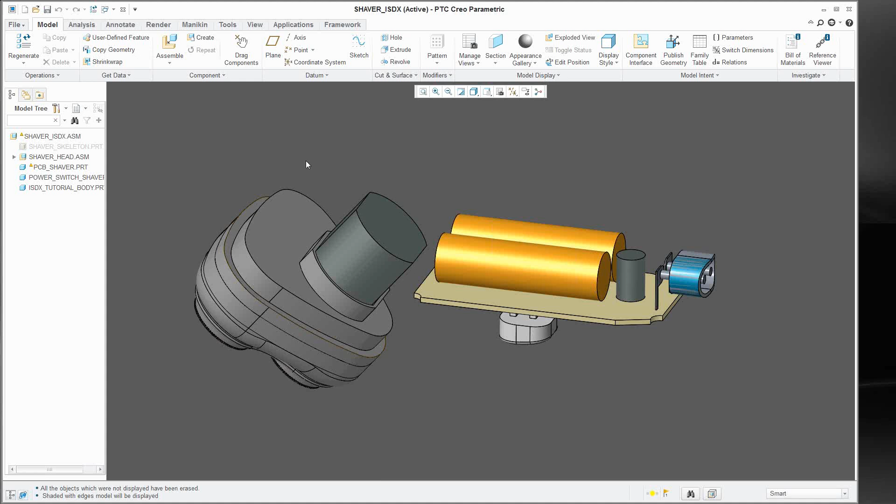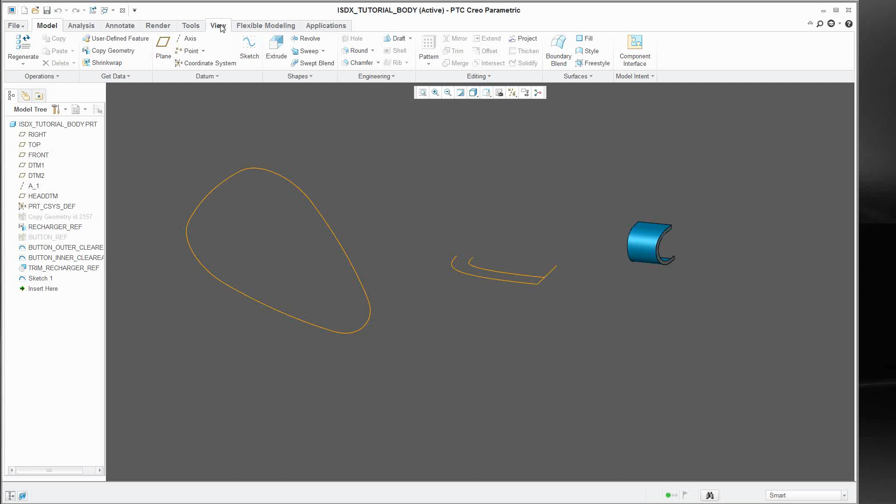Okay, so here is what we're going to start off with. It already has the head and some internal components, and we need to create the freeform body. So we have a part we already created that we have open, with some reference geometry for creating the freeform surfaces. Here we can reference images that some artists sketched up of how they want the shaver to look. We can easily put those inside the Creo Parametric session, so we can use those for reference.

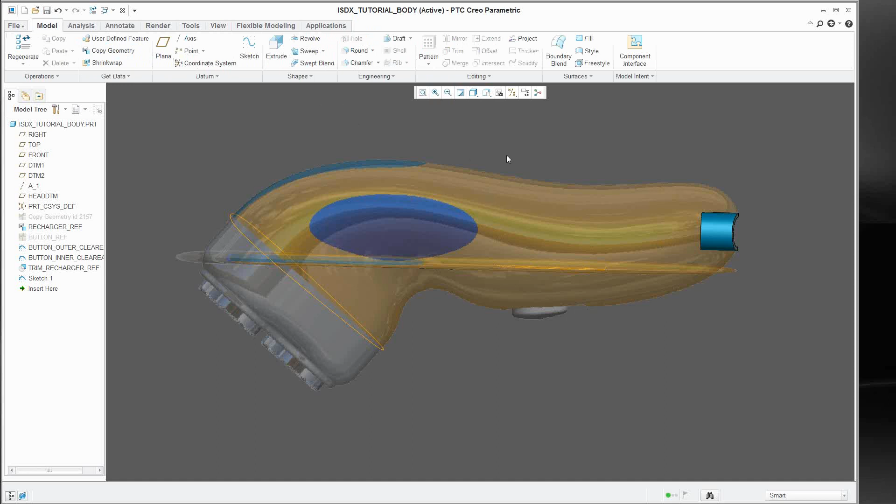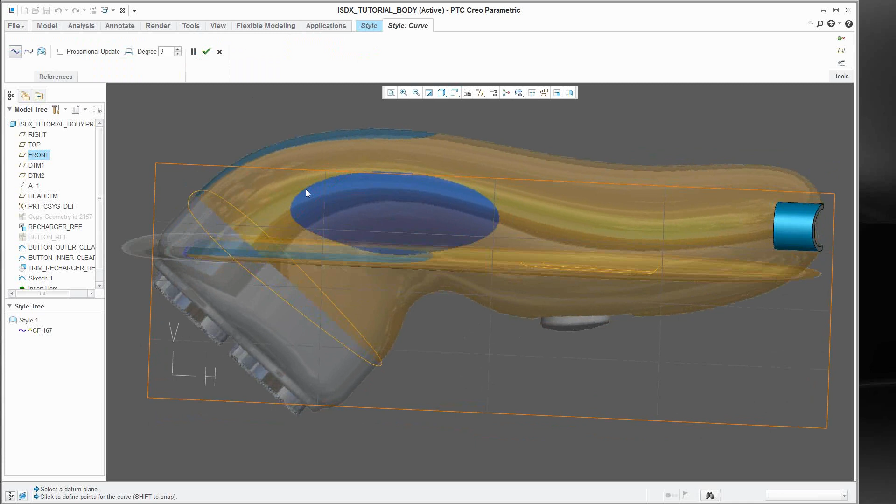So now we can go into ISDX and start creating curves. First I'm going to activate a plane to sketch on, to put my curves onto. Okay, so my first curve here is going to be the upper curve to connect the front and the back. I'm going to place this curve and attach it to the other reference geometry here.

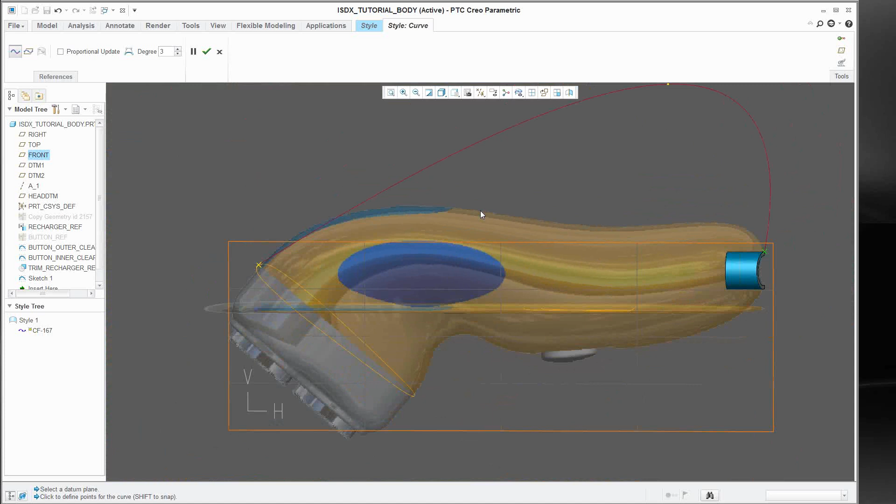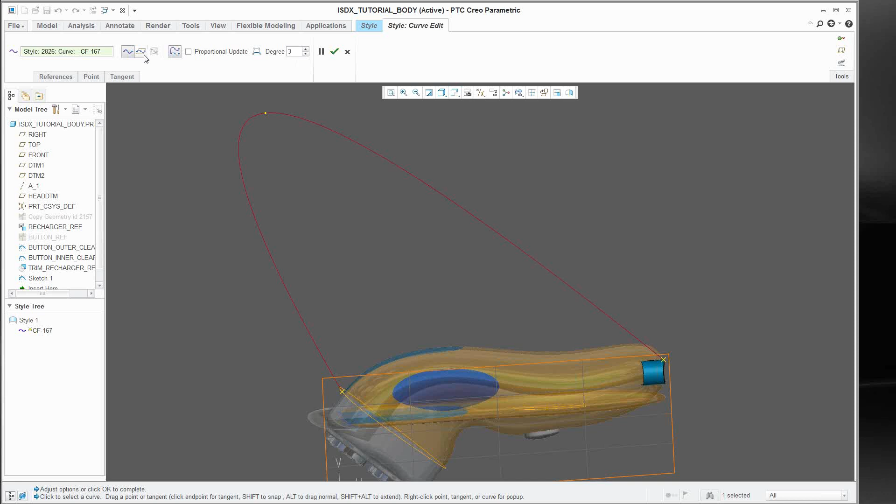And if I take a look over here, I can easily snap the curve to those references that are already there. Right now, this is a free curve, so you'll see that it's going in 3D space in and out of the plane, which is undesirable. So what I'm going to do is designate this to be a planar curve. I can select planar, then let me go in and edit this, say planar and the front plane, and you'll notice that it snaps right to that front active plane. Okay, so that looks good.

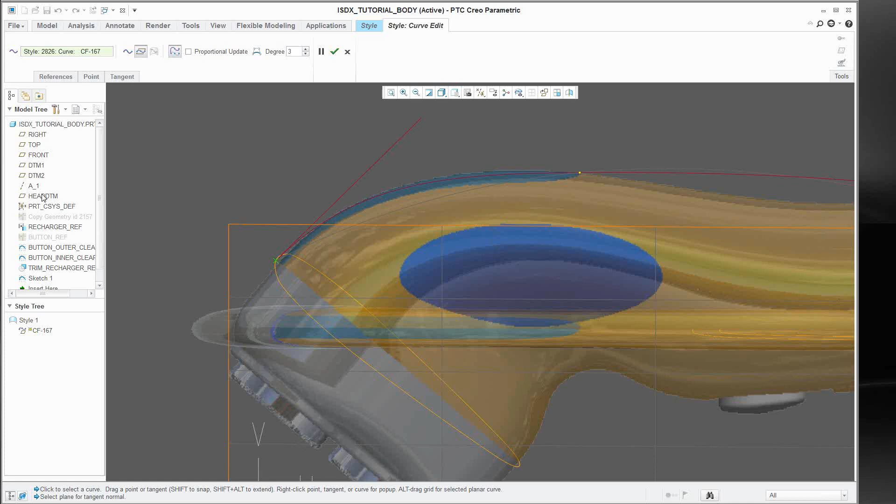We're going to go ahead and manipulate some of this curve so it conforms more to the image. We can take the tangency draggers and manipulate them. This one I'm going to specify to be normal to a specific surface that we already have a datum plane set up for, and it snaps right into place.

Then you can increase or decrease the trajectory tangencies there. And then, up at the top in the dashboard, you can increase the degree of the curve to fine-tune the shape of your curve a bit. So we can manipulate these until we have something closer to the design of the sketch provided by the artist.

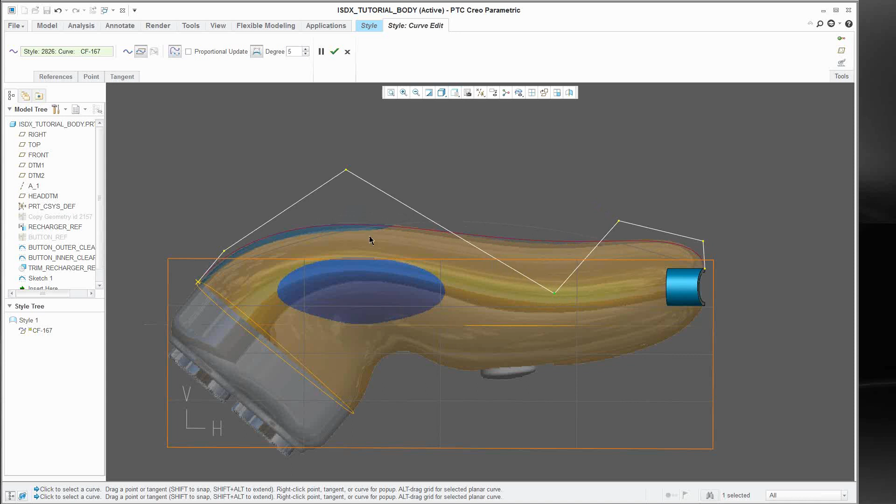So that looks pretty close right there. So we'll say OK and accept that.

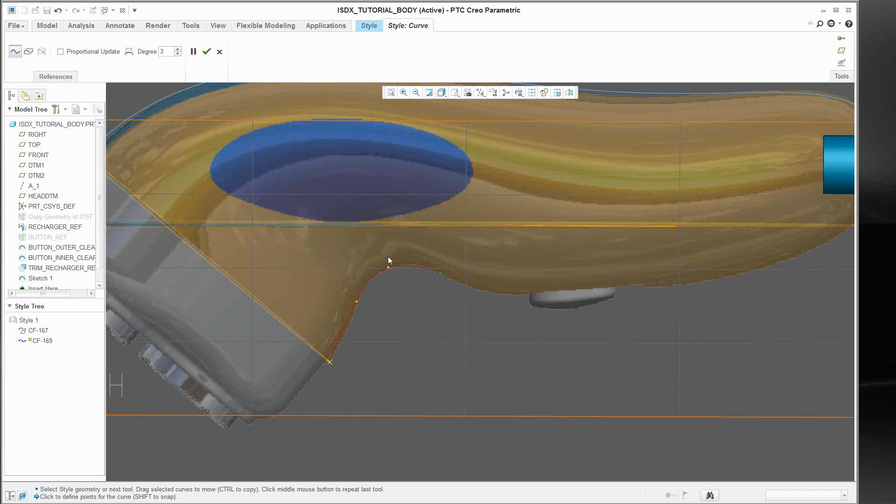So we'll go ahead and place another curve down at the bottom here. We'll snap that again to the references provided, and a couple locations here to accommodate for this curvature in the handle. And again, we'll come over here and snap that right to the reference.

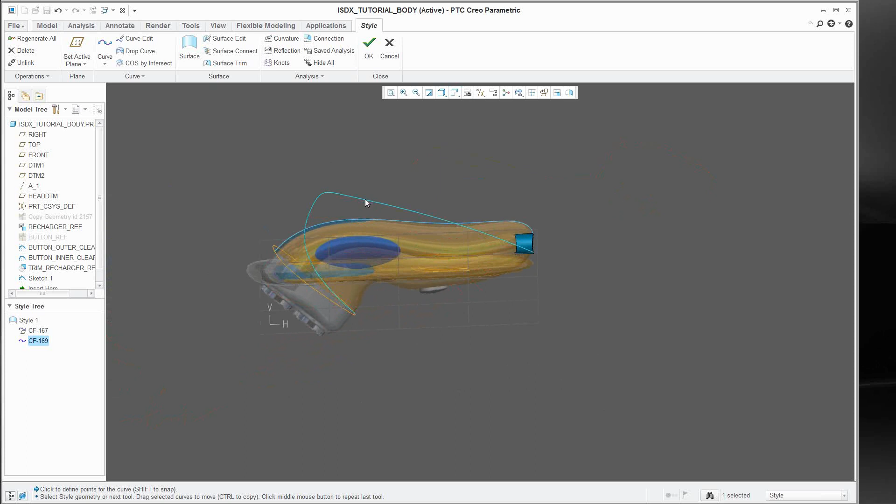So that looks pretty good. And again, I forgot to change it to a planar curve, which is okay. We can always manipulate that and say planar, and then where you want to snap it to, and that will go right to the location.

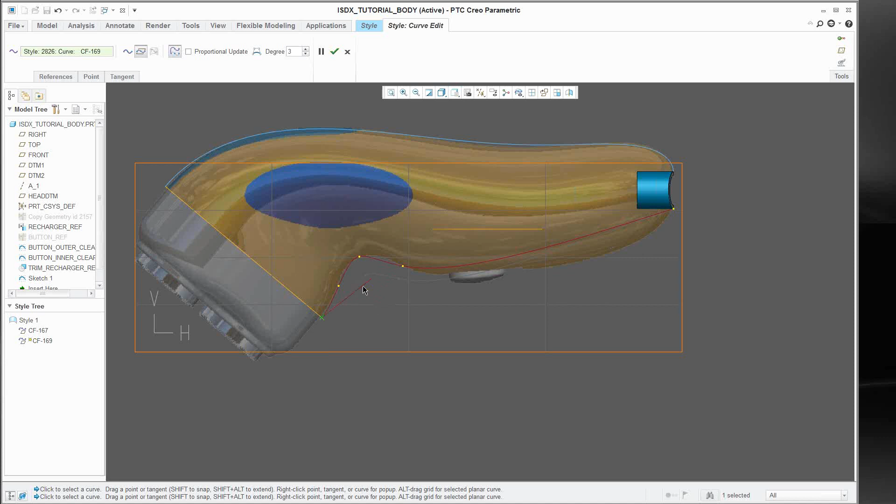We're going to have to manipulate some of these points that we put in though, which is okay. You can easily select them and drag them about. And again, this first point here, we need to make sure its tangency is normal to the surface here. So we'll select that to be normal.

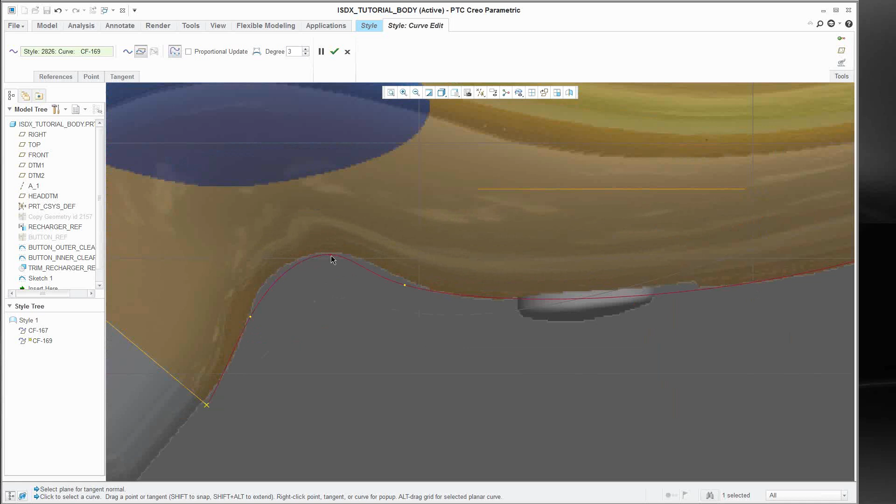And again, we're going to move these a little bit so the curve matches the shape a little better. And then come back over here and change the tangency of that curve. Okay, so that's looking pretty good. Zoom this in a little bit.

So you can play with these curves to get the right shape that you want to, and it's really easy to do. Okay, so that's two of the curves for our shaver handle.

So next we need some more curves to be able to generate the surfaces. So first we're going to create another curve that goes along the edge here.

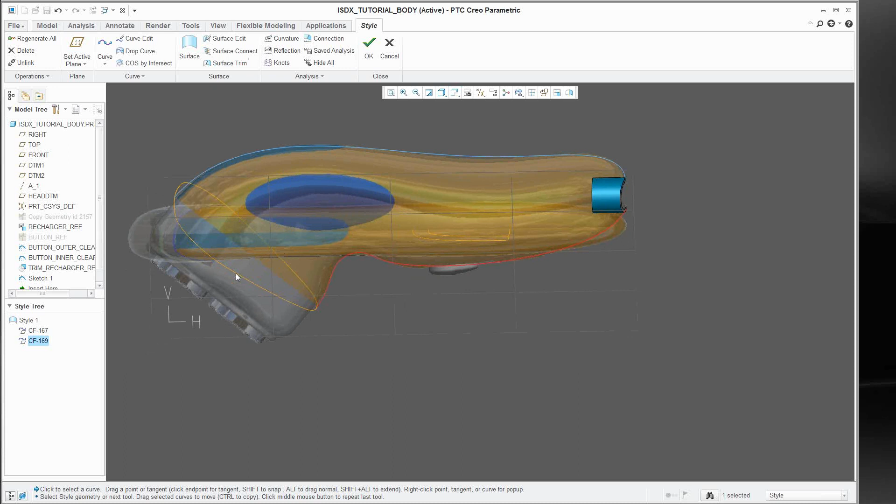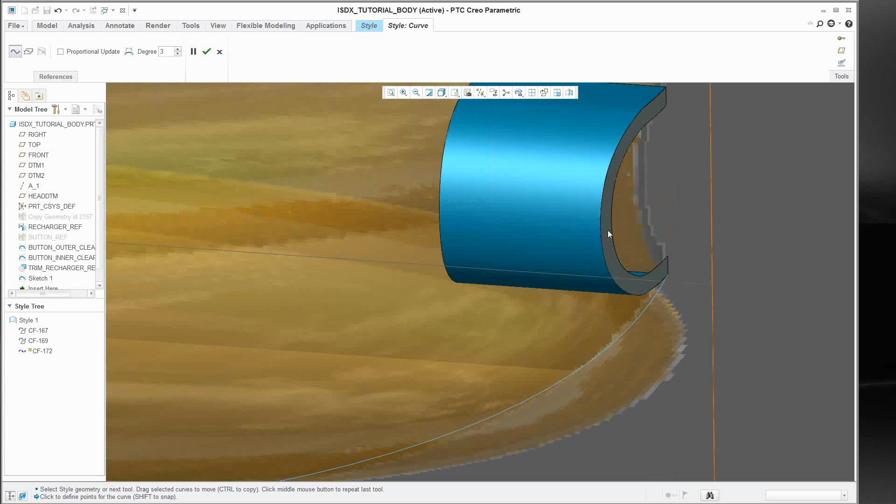So again, we'll create a curve and snap that right to this line, and this one's going to be a free curve because it's going to be at the center, so we want it to go out of plane. And here we're going to snap that also to the existing reference.

So what's nice about this is that you can utilize 4 views to generate your curves, and you can work in all of them. Oop, let's undo that. Okay, so here our curve is just going from A to B.

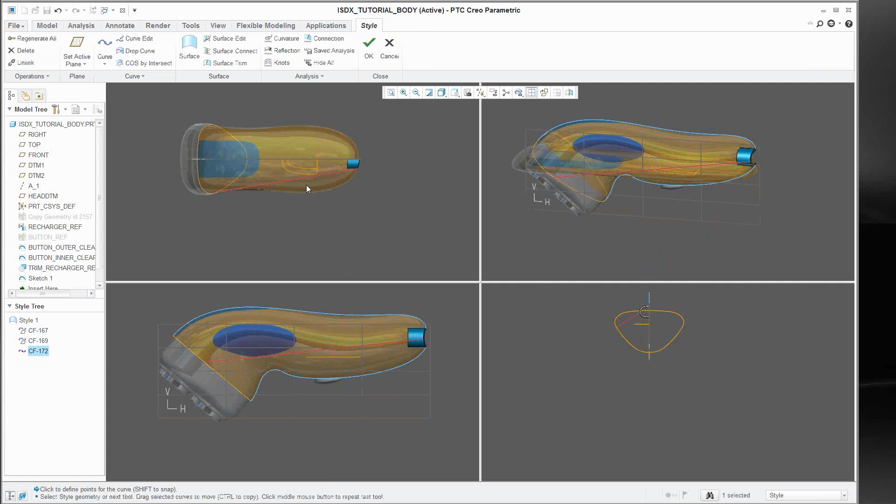So here, in this view, I'm going to specify this point to again be normal to the reference datum. Okay.

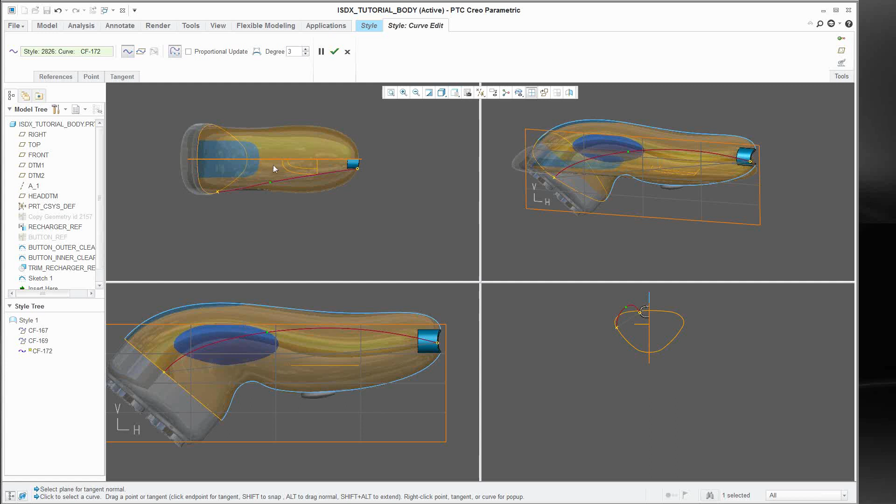And I also want to put another point in here that I can control. So I can easily do that and then move that point. And you'll see up here in the other view that the point happens to be within the body, so we're going to pull that out.

Since it's a free curve, you can easily manipulate that in all these views. So the point down here needs some more curvature, so we can easily change that by dragging the handle out in this top view. And also you notice that it's not following the image in the other view, so we can drag it in that view also.

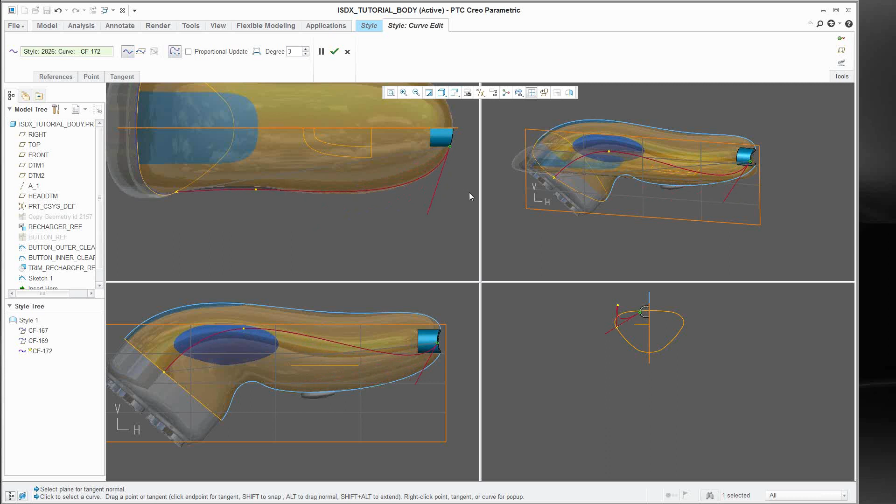Okay, so that's starting to look like the way we want it to. If we need more control points, we can always increase the degree here to refine that a little better.

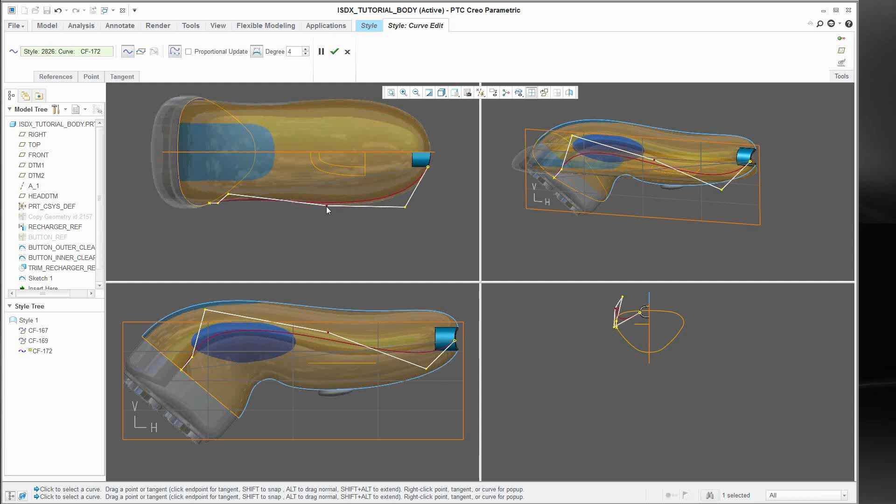Okay, so that looks pretty good. Again, we can go and manipulate this in all views here to refine that. So that looks pretty good there.

I could take a look in my ISO view and see that those 3 curves are starting to form what I need to make the surfaces. So down here at the end, I need another curve to connect these 3 curves together, so I have an end to my surface feature.

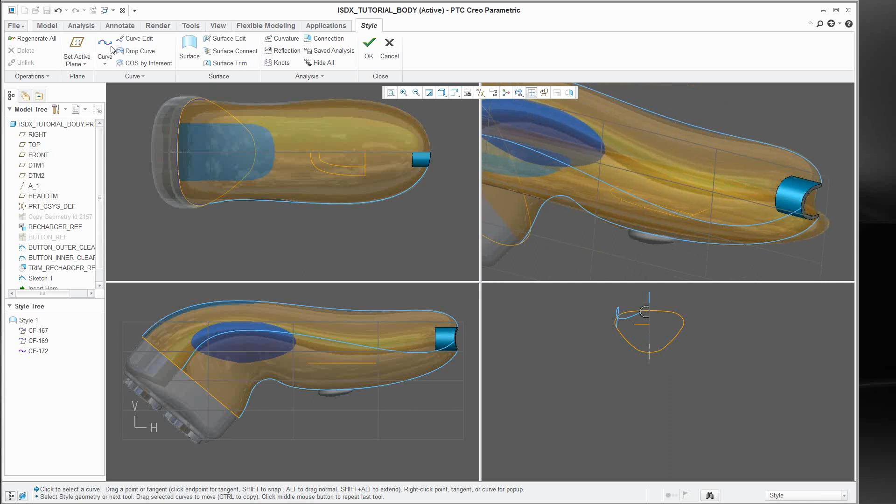So I'll go over here and create another curve, and I'll just snap it right to these existing curves. Okay, but we see it doesn't really match up with the existing geometry we have here.

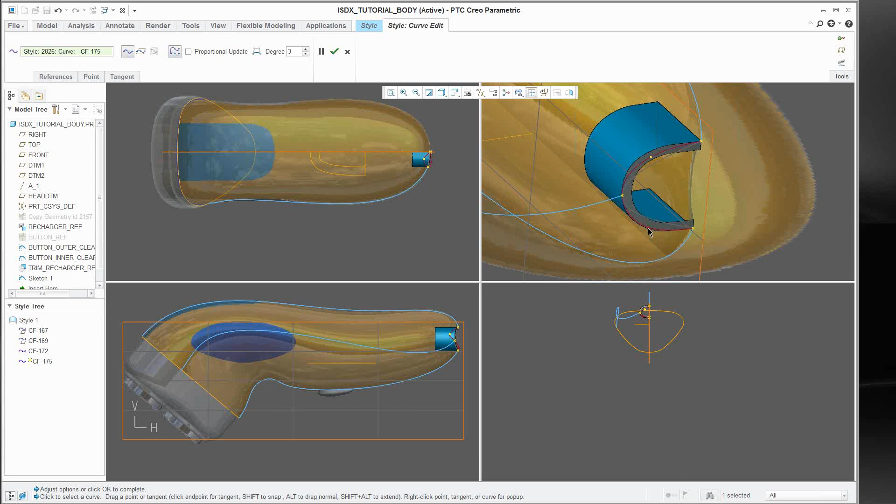So we're going to go ahead and add some other points in here that we can manipulate so it lines up with the existing geometry.

So what's nice is that we can see how this is out of plane. We can just take this one point and snap it right to that reference, so even if it's a curve and it's out of plane, you can snap it right there so the geometry is accurate. I'll do the same with this other point. So that looks pretty good.

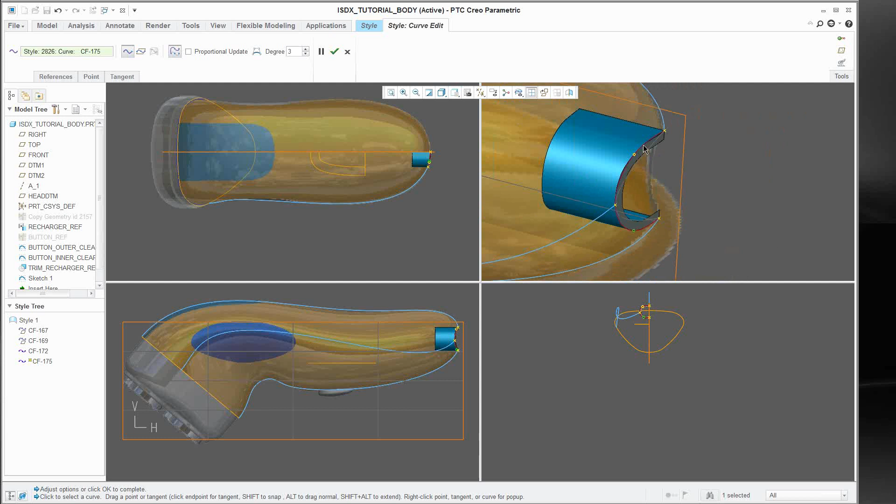So now we're done with this feature here. We can exit the 4 views and wait for it to process.

So we're pretty close there. I had a technical difficulty, so I'll have to reopen up Creo Parametric real quick here.

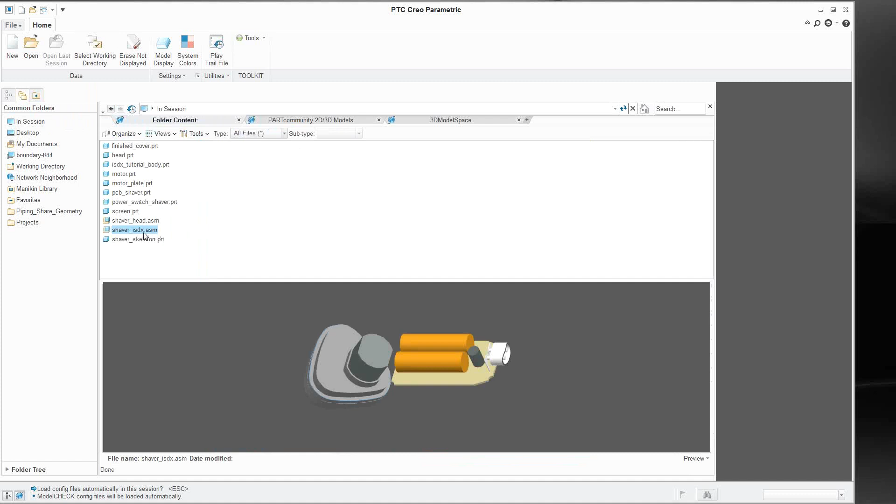Okay, so we're back up and running. Let me get those files up and running again. So if I see what we have here, here's the shaver body. Let's see if I can put this back together real quick and create some curves.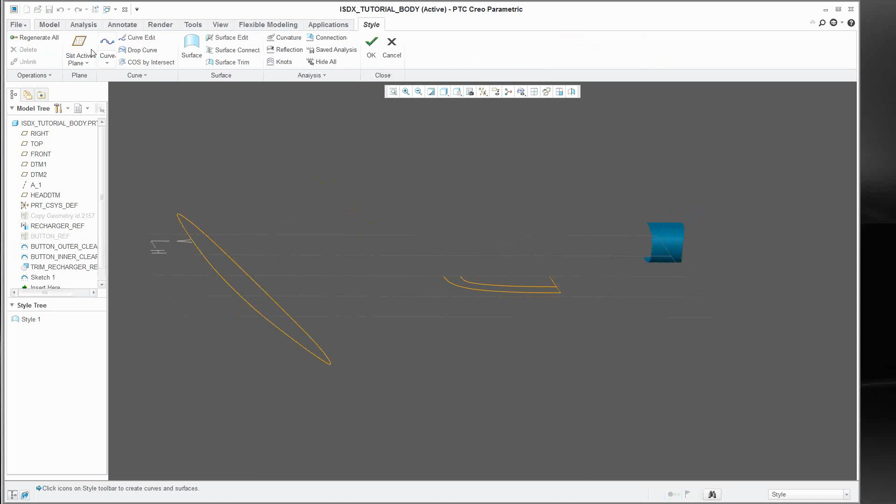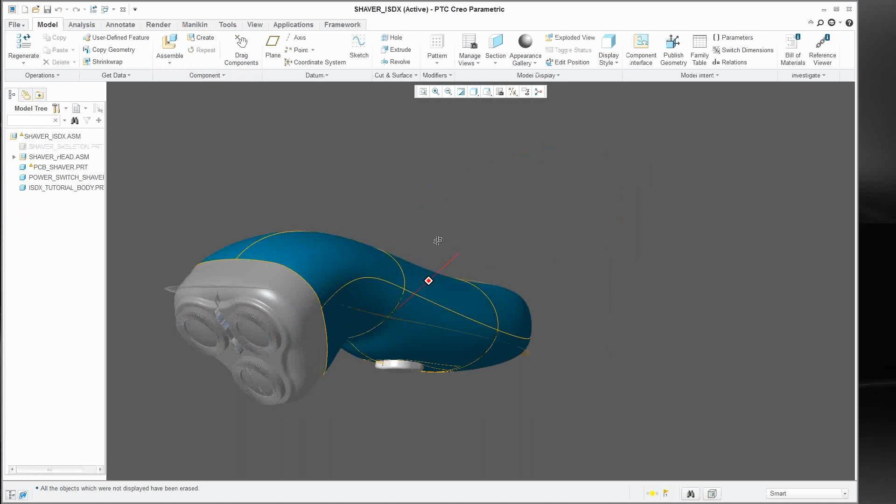Oh, better yet, let me go back and see if I have... okay, so I'll go in here and show you the end result and then work it backwards. I can do that fairly easy. Let me turn off these images.

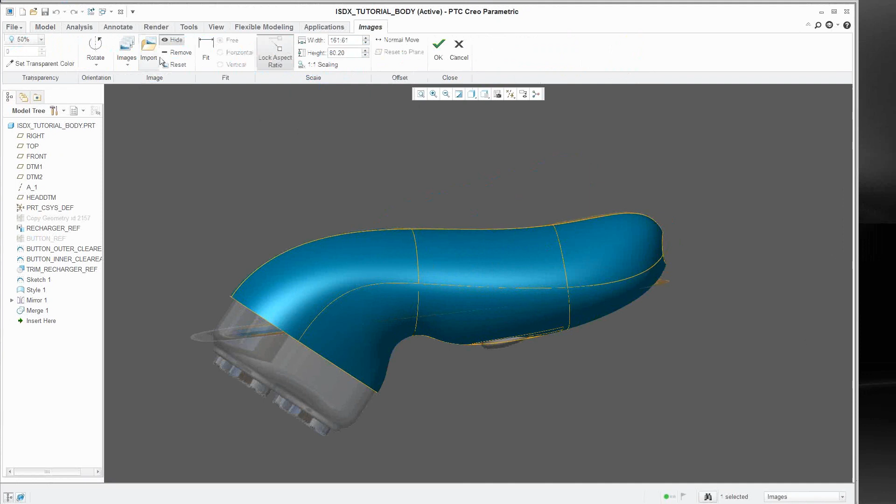Open this here. Okay, sorry about that. So let me turn off these images. Okay, that one. This one I would like to hide. Hide all of these. So let me get rid of some of these features.

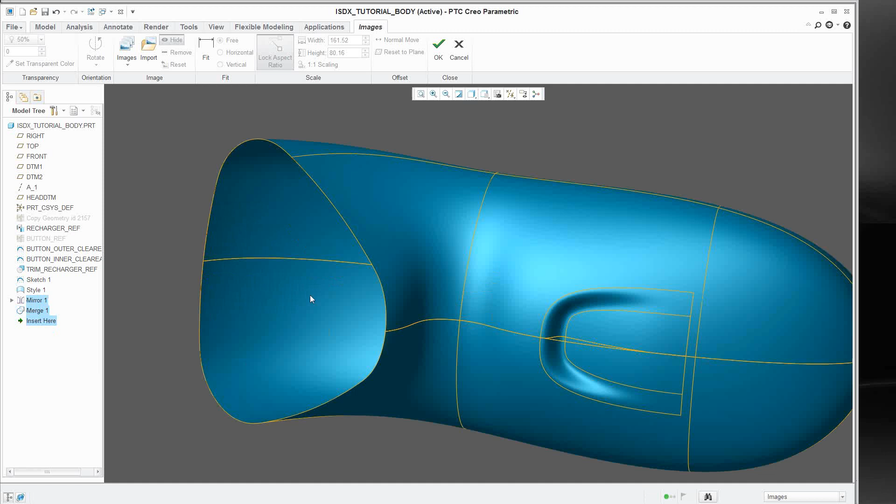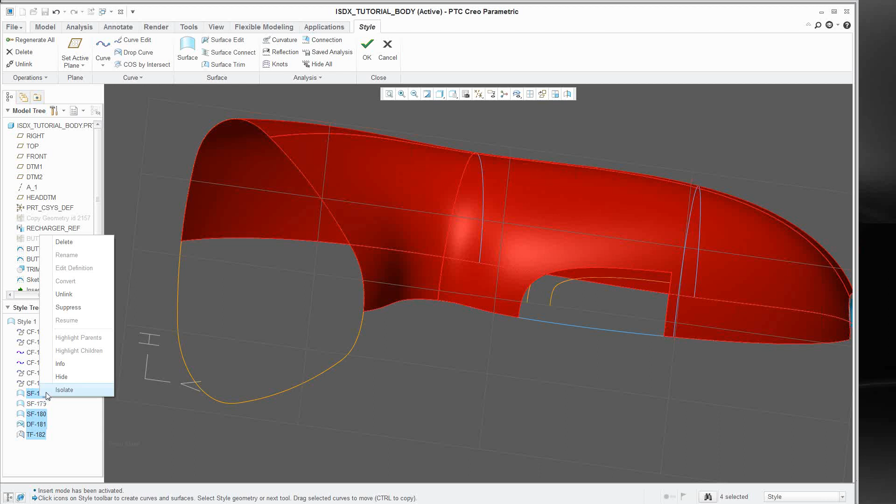And go into the style feature, and just delete some of these. There, now we're back to where we were pretty much. Okay, let me get rid of these curves. Okay, great, so now we're back to where we were. Sorry about that. So we have our 4 curves here.

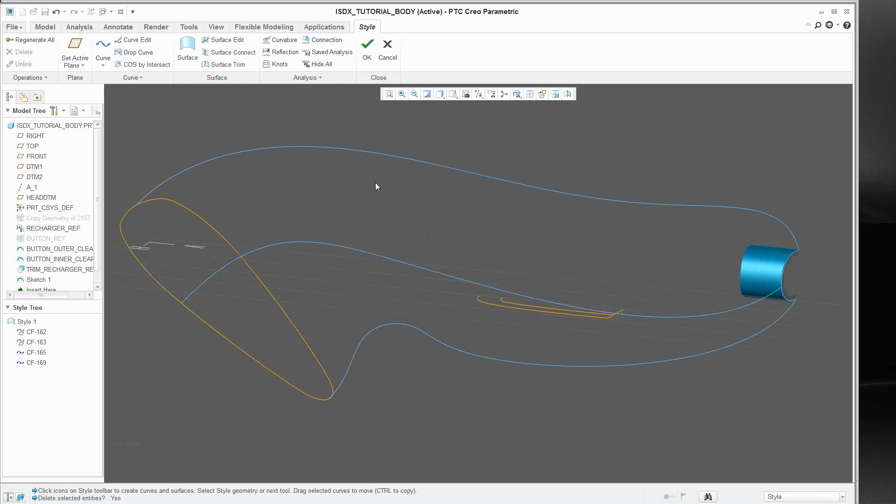We need to create some other curves in between here to reference so we can manipulate the shape a little better. So here we're going to create another curve, and we're going to set the plane to reference. It has to be a planar curve to be able to reference it.

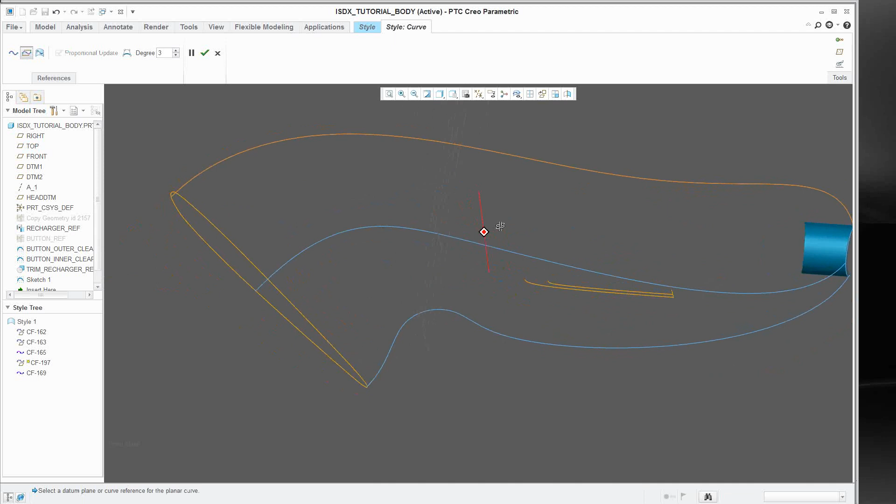So we'll go to the reference collector and set the plane right there. And that's a little bit far away, so we'll move it a little bit further. You'll notice that this plane is normal to the reference curve. There we go. So that looks pretty good.

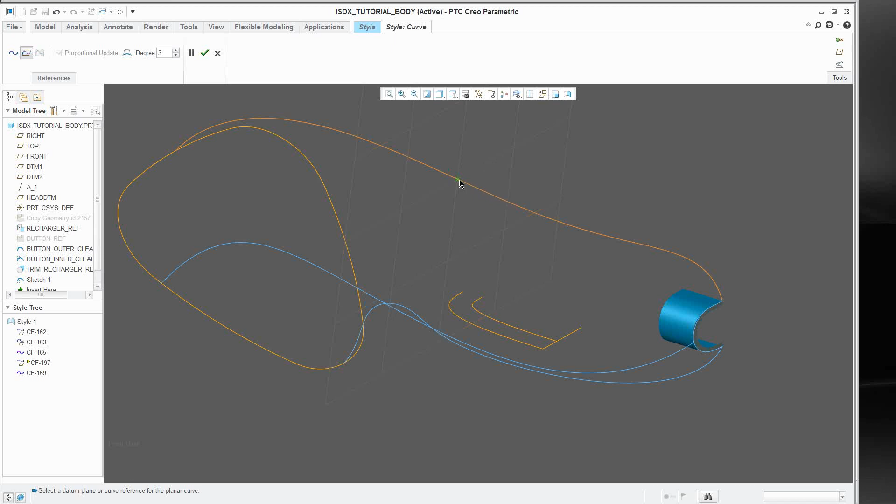So now what we can do is easily create a curve that connects these 3 curves together. I'll go ahead—notice that it automatically snaps to this point here because this curve intersects the active plane. So that makes for easy curve creation, as you can see there. That looks pretty good, and I can come back and edit the tangencies of these points.

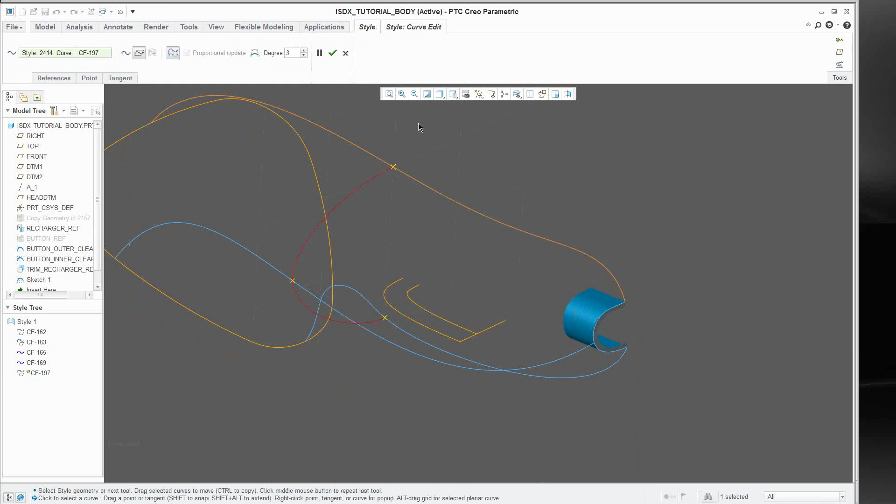I want this one to be normal to the front. Same with this guy here, I'm going to change that to be normal to the front. Okay, so now that I have that, I can easily copy this curve and then drag it downward. You'll notice that all these points stay connected to the curve as it gets dragged down.

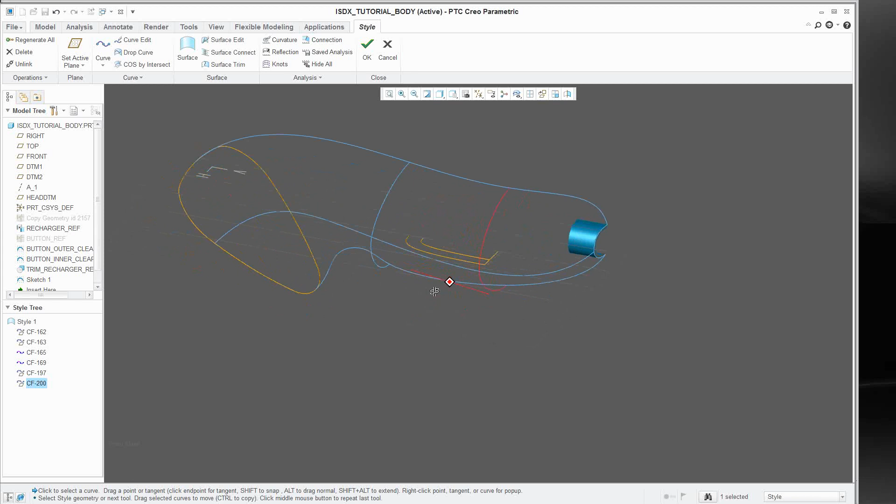Okay, so I have this maybe a little bit further, so I'm going to utilize some of these existing sketches for references. Okay, so now I'm going to go ahead and create a surface feature. With this, you can select the surfaces in pretty much any order and create those high curvature surfaces that you can see here. So it's very easy to utilize.

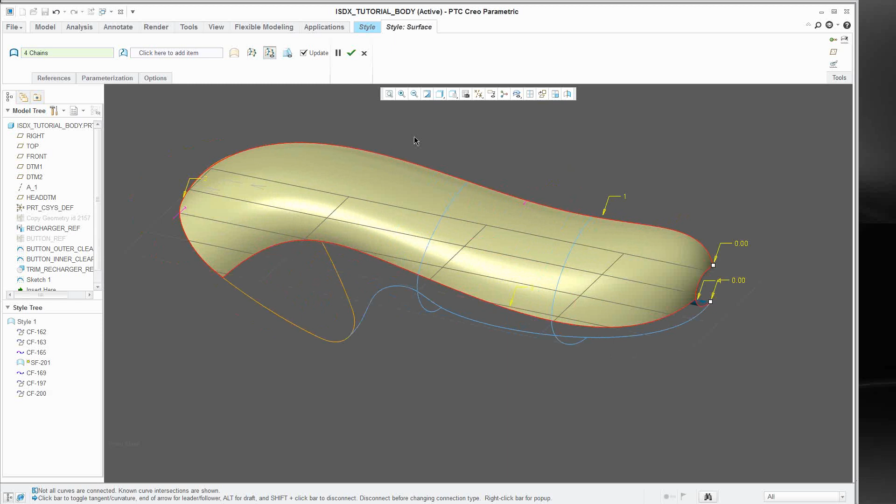So we see that these curves here aren't really being utilized right now. The curvature goes outside of the bounds of these curves that we would like the surface to lie on, so that would really be an internal curve. So we'll go ahead and select those so they lie down on top of those curves. That looks pretty good.

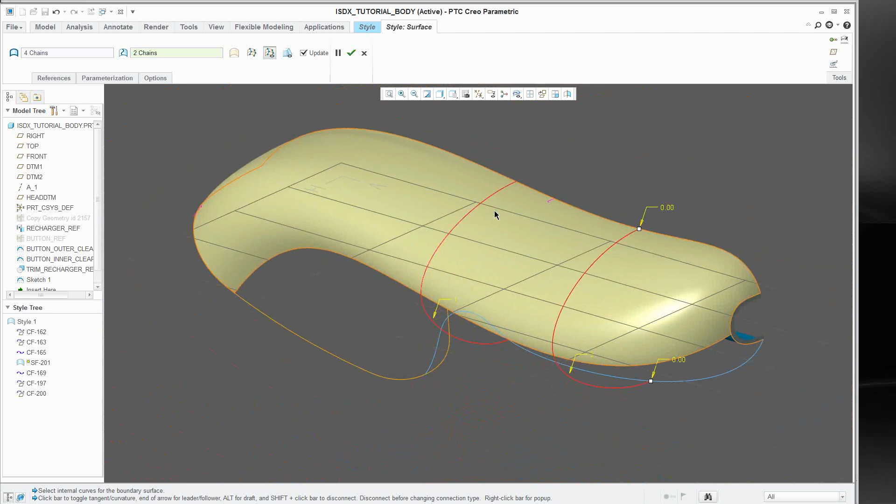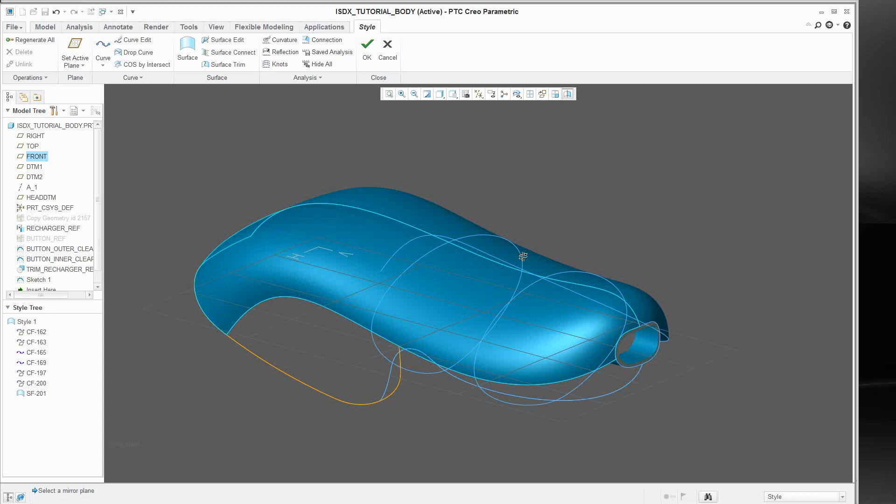Okay, so we're also going to check the curvature here just to see what it looks like whenever it's all done. So you can visually mirror the surfaces, and I can do that here and just select the reference for mirroring, and you'll see that it's starting to look pretty good. So the curvature looks nice here within this mirror.

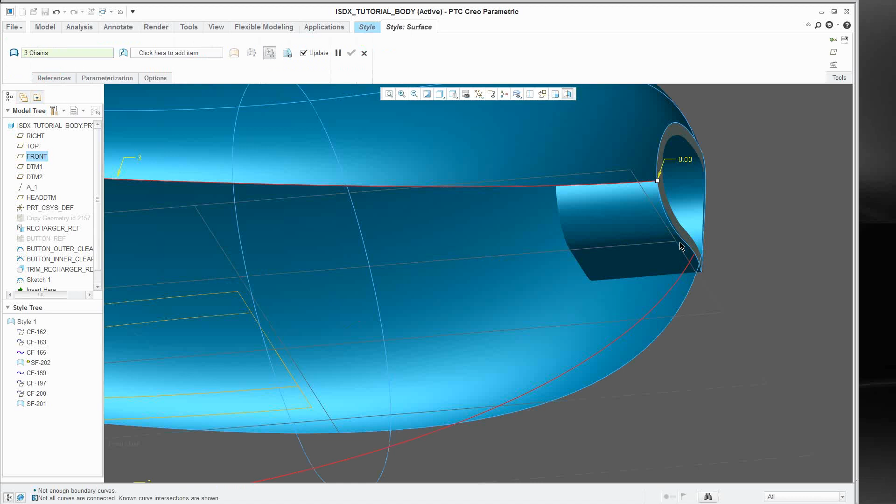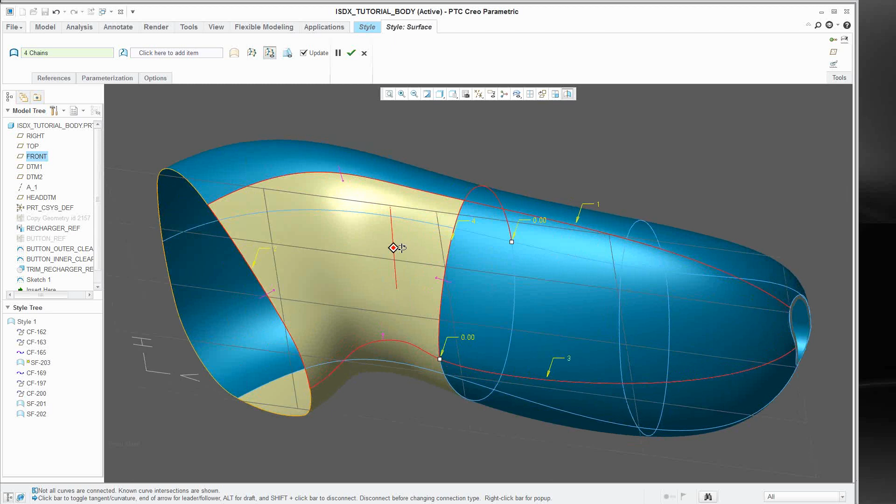And then again over here, we can fill this gap in with the surface by selecting those reference curves. Now you see those little arrows by all the tangencies of the surfaces, is where you can manipulate whether it's a position, tangent, curvature, or a draft tangency. So you can increase or decrease the amount of curvature there. Okay, so that looks pretty good.

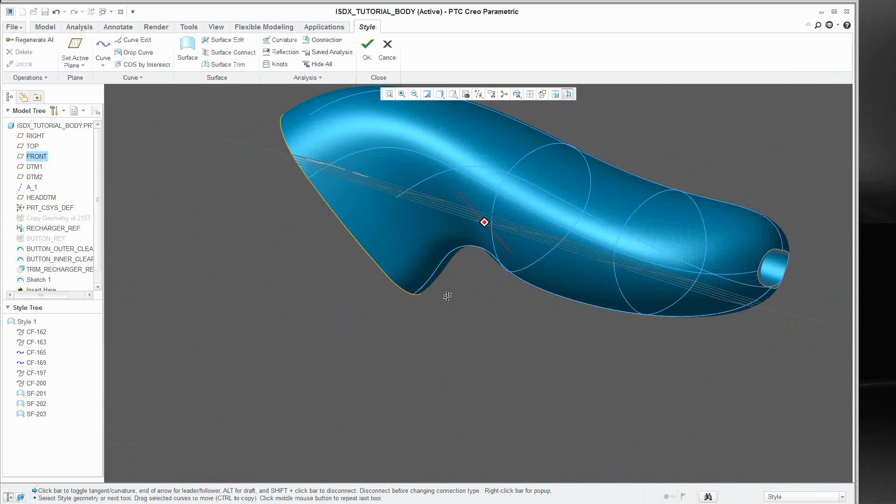So this is really starting to come together. But we do realize there is another feature here.

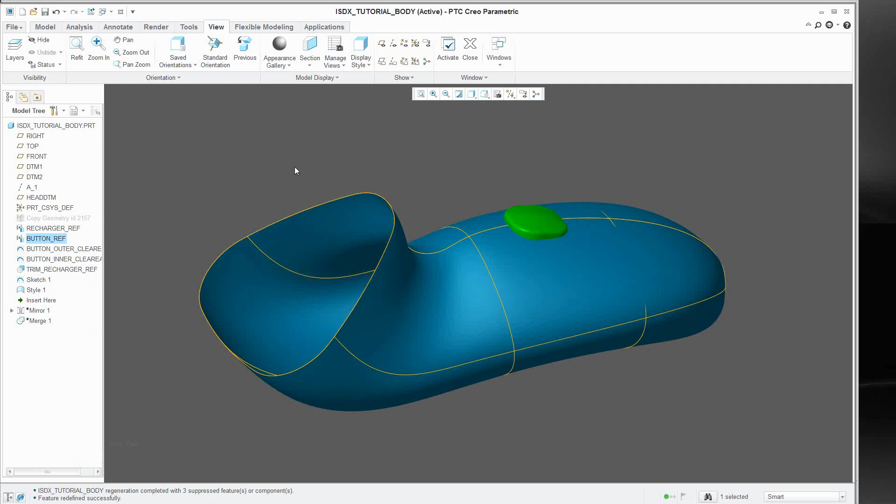Okay, so we'll go ahead and unhide this. We need to be able to have a little scoop in here for this button, so we need a little relief in this section for that. So we can go in and

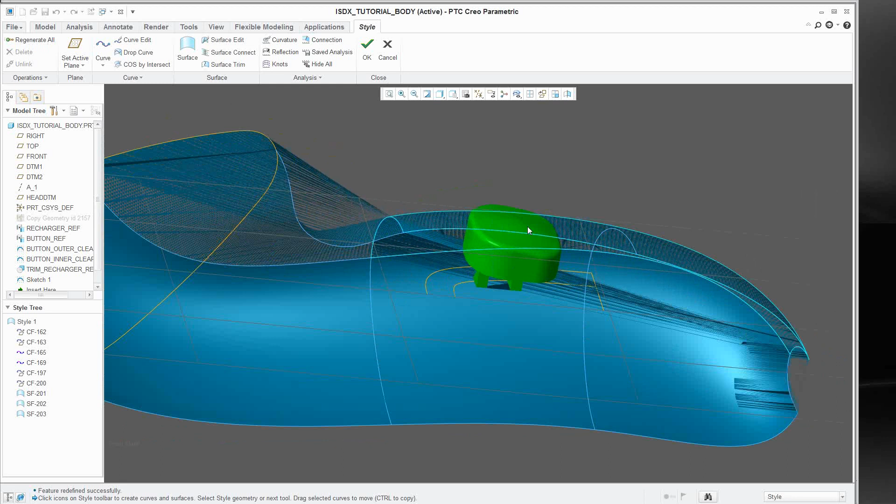utilize ISDX for that. We're going to get rid of the visual mirror here, and then make another surface that comes down and scoops out this portion.

So we notice we have some curves, parametric curves down here that we can utilize to trim some of these surfaces. So what we're going to do is

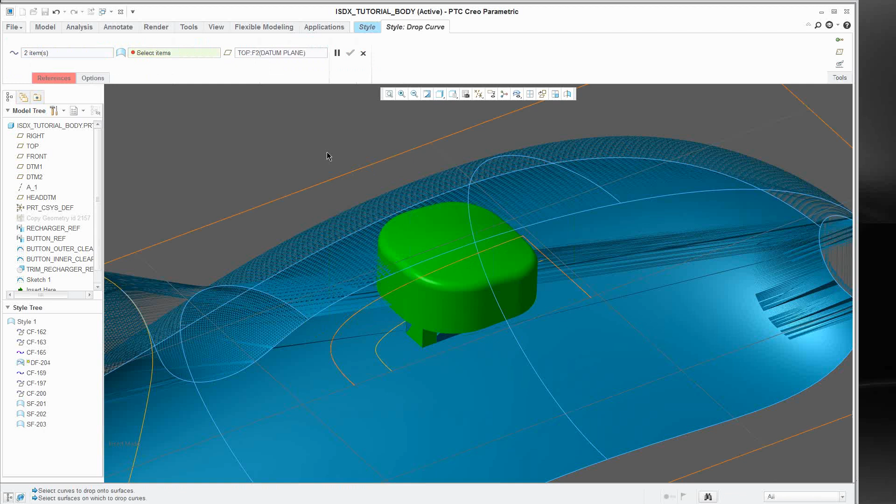drop these curves on the existing surfaces. We see those get dropped onto this surface, and then we can utilize those curves to trim them.

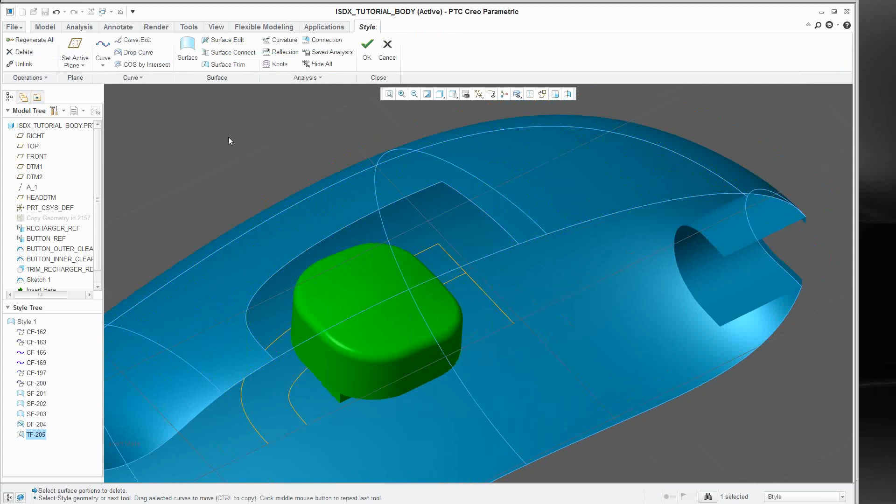So we can easily trim away the surface within that region. Okay, so that looks pretty good.

So now we need to create some geometry, some surfaces to represent that scoop. Okay, so here we're going to place a curve, the free curve,

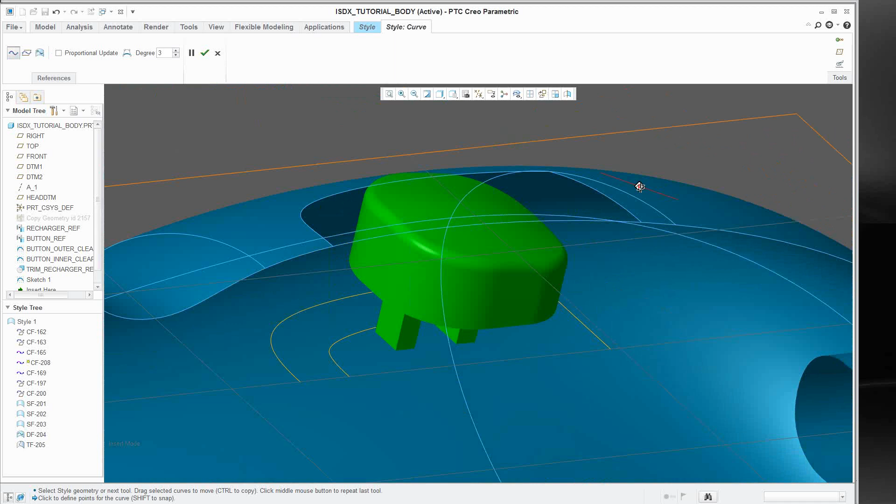and we would like to go from here to a little beyond where we want to utilize the surface, because we're going to end up trimming some of that away, and that's called the overbuild method.

You can build some of your surfaces and curves a little bit bigger than what you need to, and then trim them away.

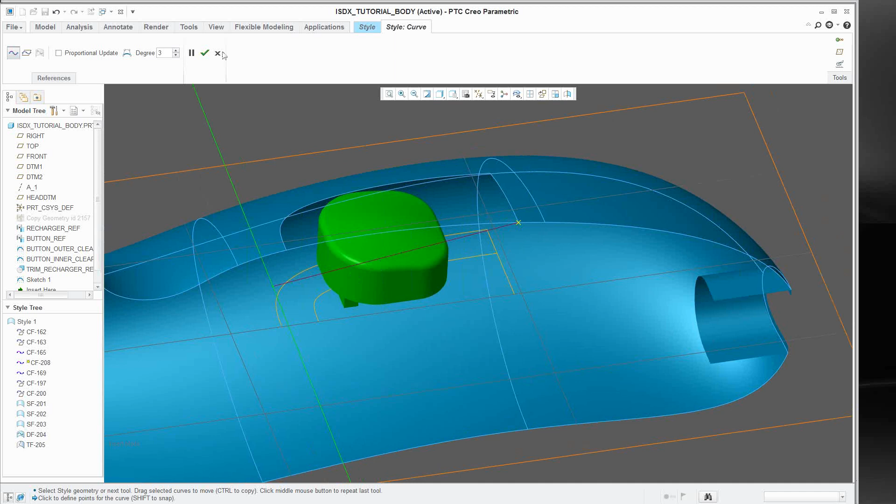So that looks good right there, except we would like to change the tangency here a little bit, so it is tangent to the existing curve there. So that looks good.

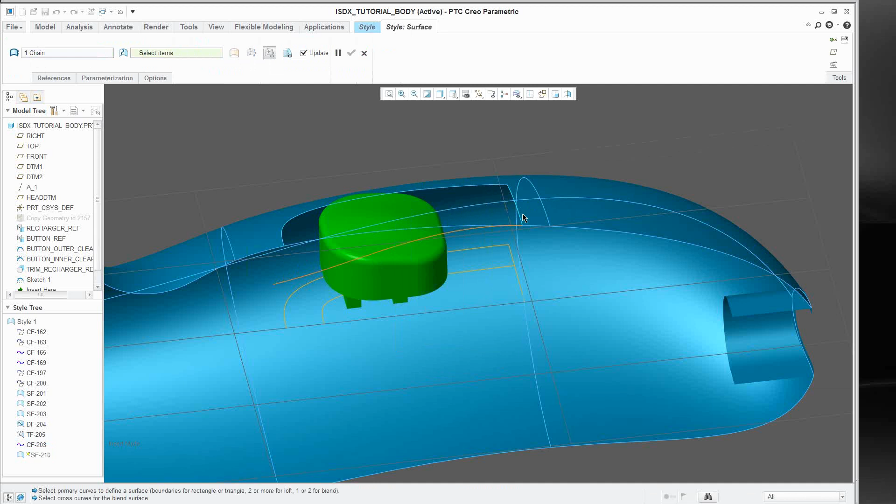And then we can make a surface out of that existing curve and then utilize the existing edge here for a cross curve. That creates our downward swooping curve or surface.

And we have some other geometry down here that we could easily drop onto the surface that we just created, and then do the same trimming process as before.

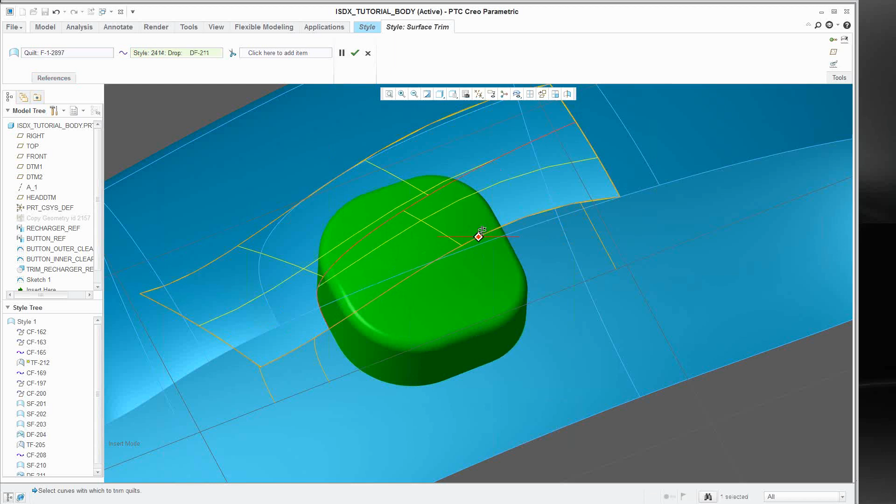Except this time we're going to delete this outside portion, so we can put another curve and surface in there to connect them together.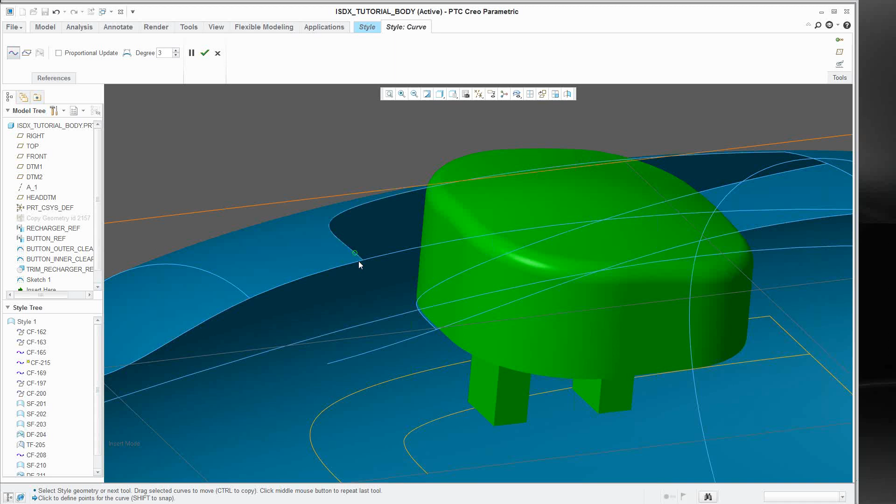Okay, so that's starting to look pretty good. So let's go ahead and put another curve in there. And again, we can snap that right to this existing geometry.

And then afterwards, manipulate the tangencies of that curve. So that looks good.

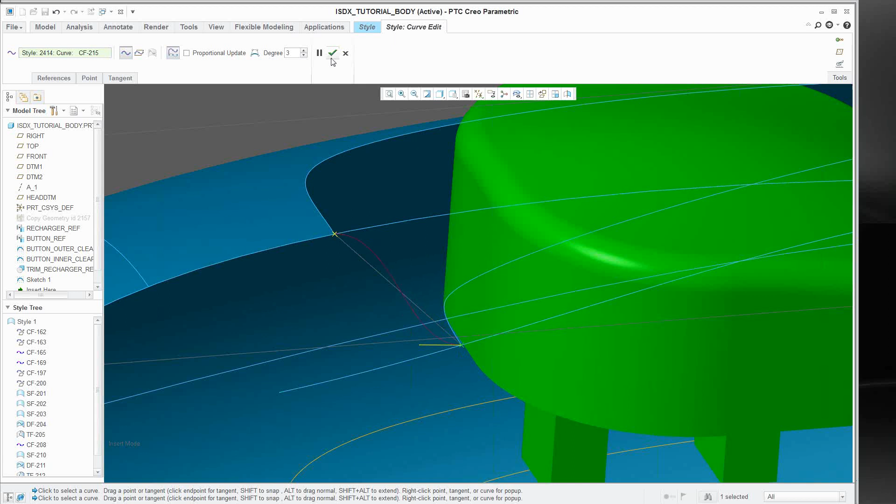We'll accept that, and then all we have to do is generate that surface. So we go up here at ISDX and select the boundaries of that surface, and we'll see it generates that nice swooping surface for us.

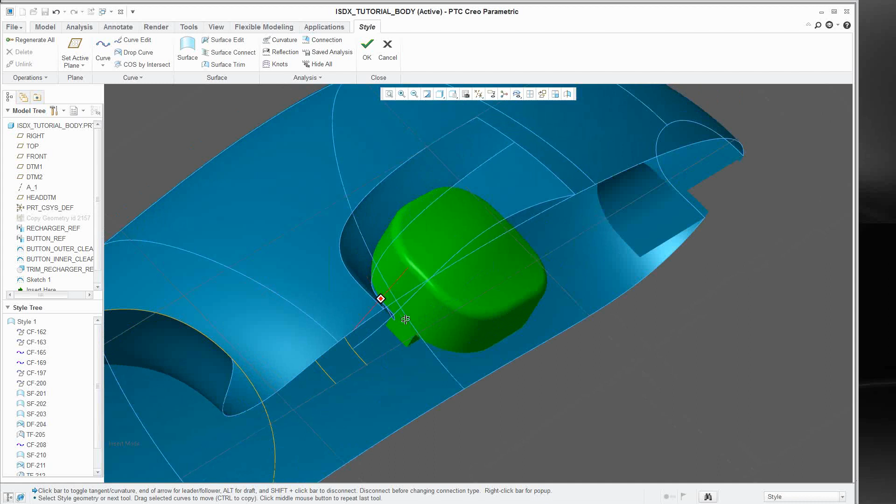So now that we have all these surfaces, it looks pretty good. We can go ahead and exit out of ISDX.

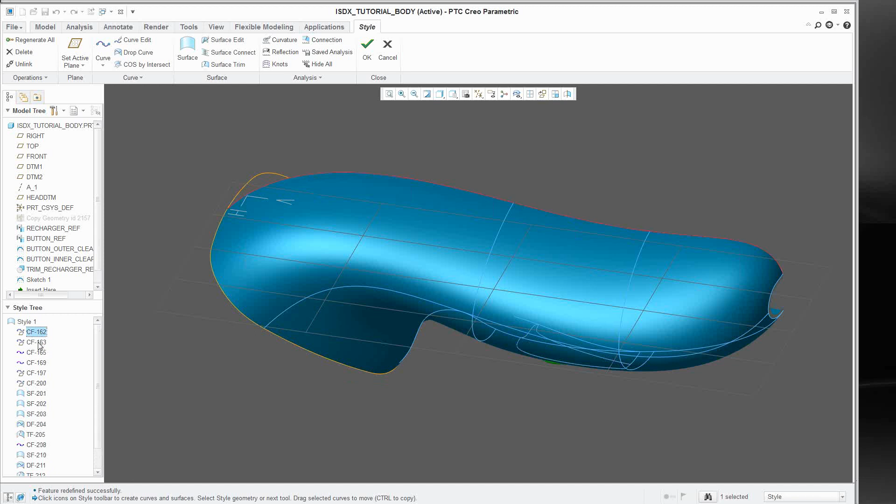And it looks like we're missing a patch up here, so we'll go back in real quick. Okay, so that looks good.

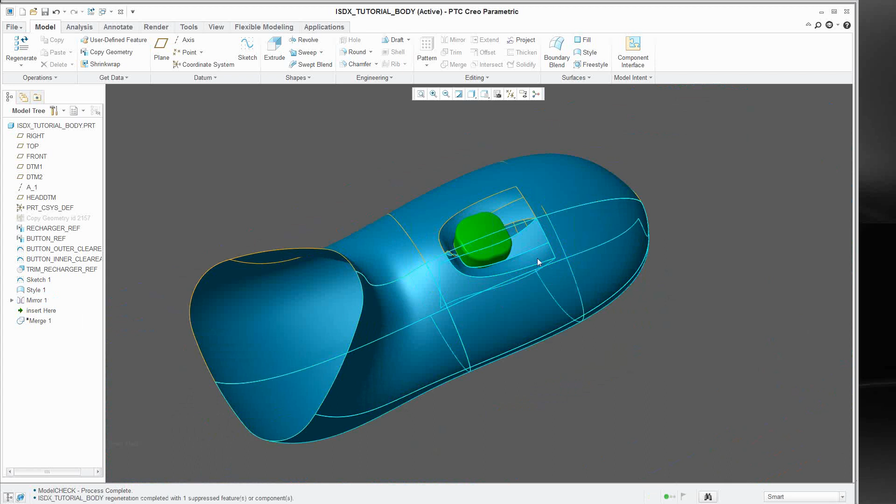So afterwards, we can go ahead and mirror those surfaces over to create the entire body here, and then merge them together afterwards, so it's all one surface.

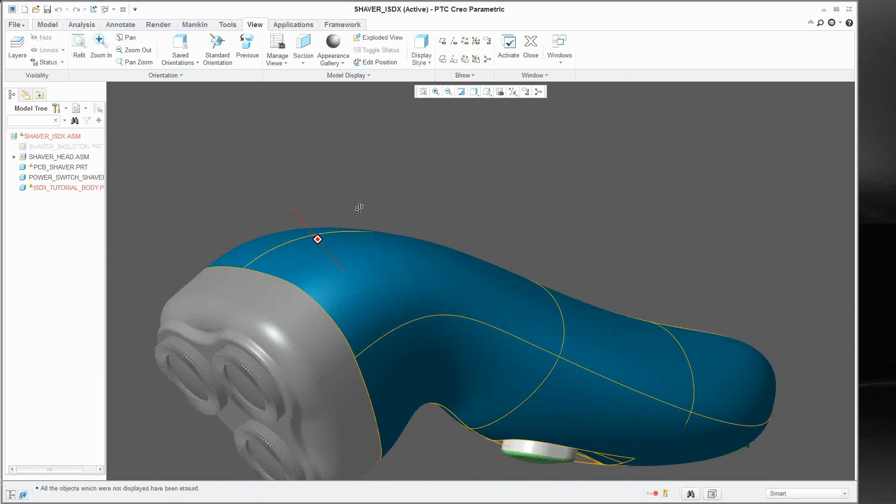And then we'll take a look at the top assembly and see how it ends up with the rest of the geometry in there. So we can see the shaver head connected to it, of course the button, and the receptacle for the electric hookup or the charger. That looks pretty good.

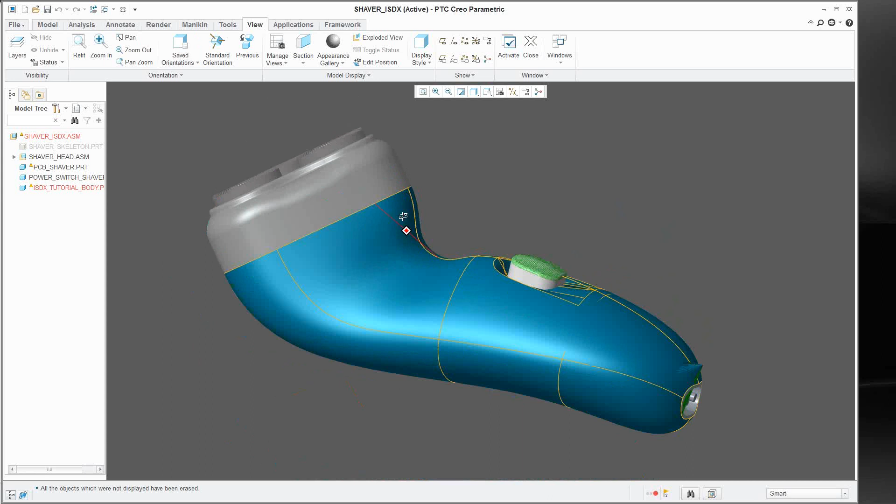Afterwards, we can utilize this in any of our other Creo apps. If you use it for making your drawings, you can use those surfaces for your machine purposes also in your manufacturing systems. So if you want to use them for your NC codes, you can easily reference those for that also.